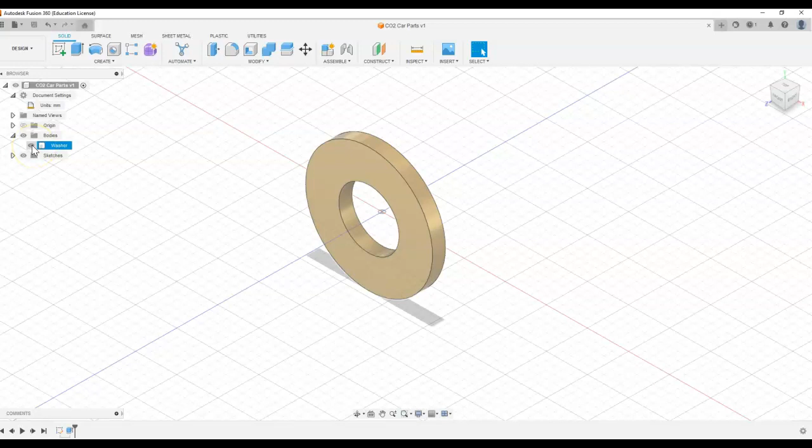Okay, so I'm going to put all my parts in the same file. Everybody does this a little differently, but I think it makes sense to have all of these. So I'm going to utilize the eyeball here and make that invisible so I can always turn it back on when I need it. All right, so we're going to come out here. We are going to draw two concentric circles. You can choose to draw them first and then dimension them, or you could dimension them as we go.

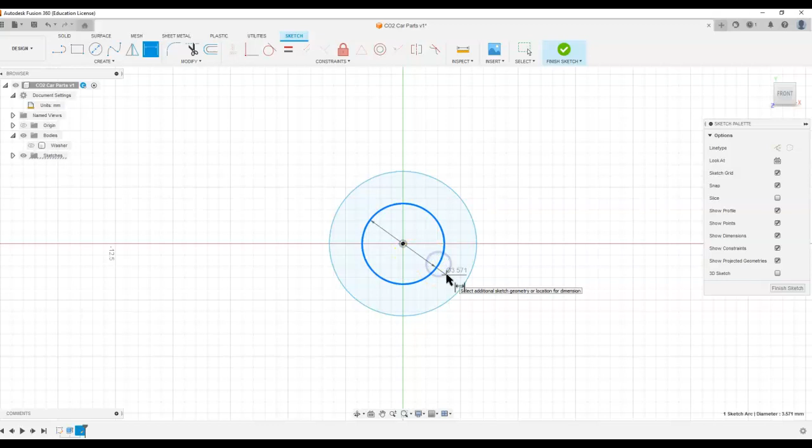I am going to take a look at my outside one versus my inside. Let's make the inside diameter accurate first. So we have 2.38 millimeters. So I'm going to use the diameter tool. We're going to say 2.38 millimeters. I said diameter, I meant dimension tool. This one is going to be 3.18 millimeters, right? So we have this overall sketch. We're going to finish that sketch, and we have this isometric view.

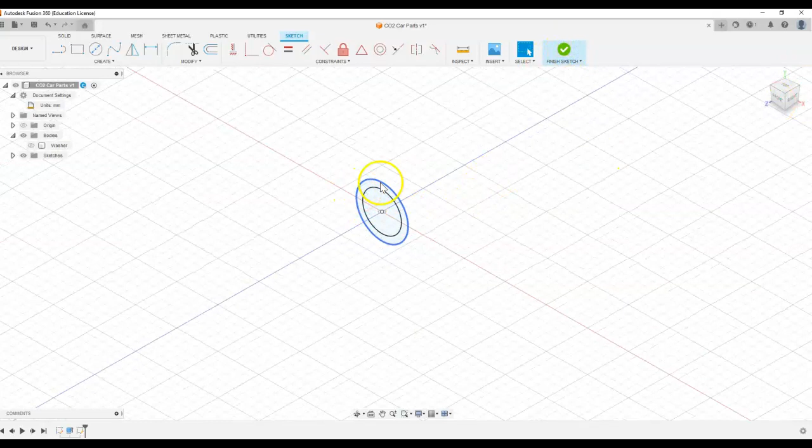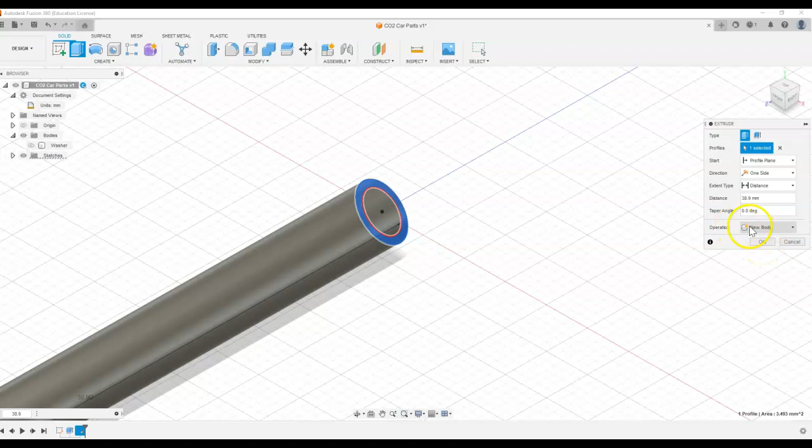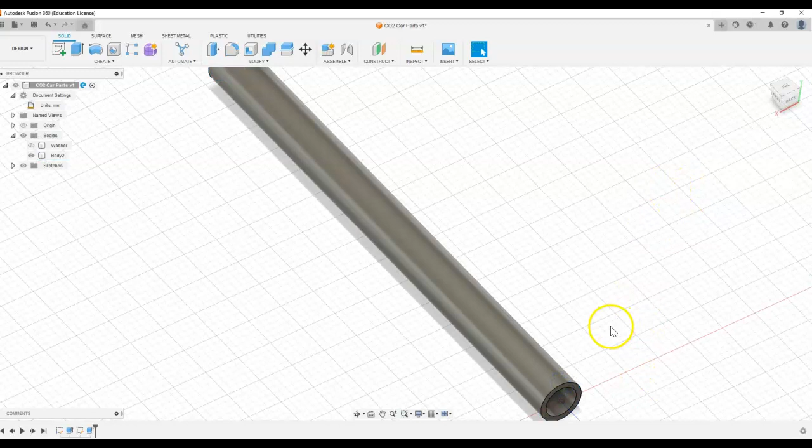This is where the fillet component comes in, you're going to need to do 0.4 millimeters so that it actually rounds a bit. But we actually want more than one edge. So I'm going to hit this plus sign here. And you know what? There's a better way to do that. Let's actually click both of the edges first. And then we can apply the same 0.4 on two edges. Hit enter, you got your axle holder, right? So just like before, we're going to go ahead and rename this to our axle holder.

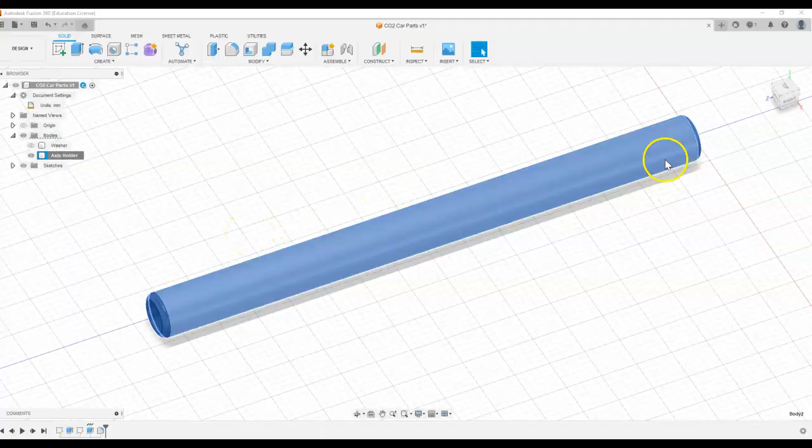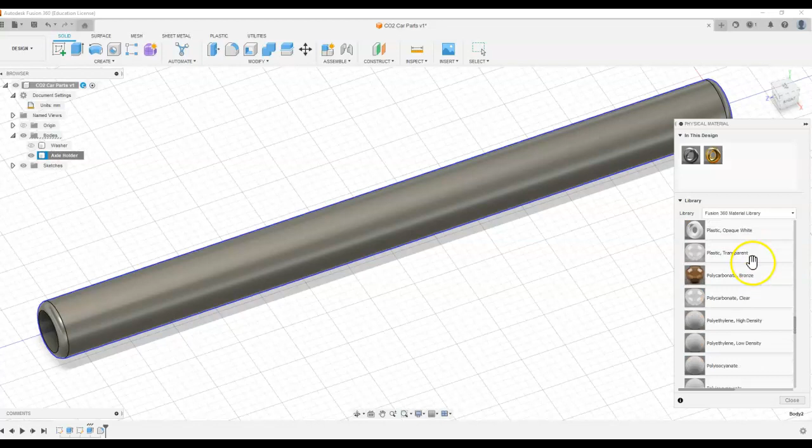And this is a type of plastic. I don't remember which one, polypropylene. So we are going to go out here, go to physical materials, and we are going to find polypropylene in our material list. So let's take a look at plastics here. Polypropylene here. Polypropylene. So now here it's going to be white. Ours is actually black. So let's try to be consistent here, and we're going to color this black.

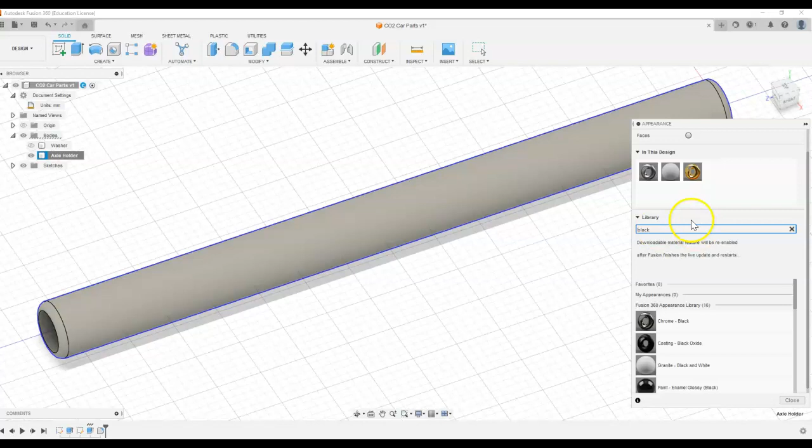This is the difference between your physical material and your appearance. So if we actually just type in black, let's do a plastic glossy black, right? That's not going to change our actual material properties, but it will help you keep things consistent when you start to look, right? That's all for the axle.